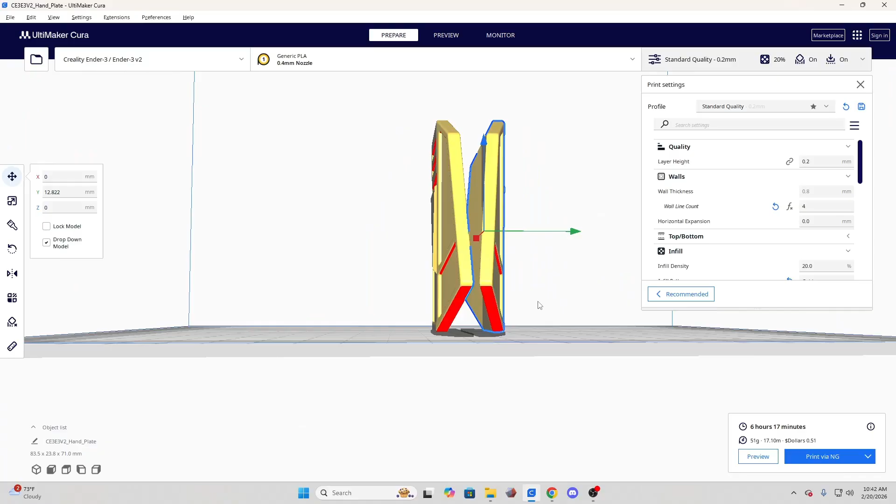Today I'm making a tutorial on how to measure objects within Ultimaker Cura. I frequently have to measure a lot of my objects whenever it comes to my cosplay projects and the props that I send out to my customers for custom sizing.

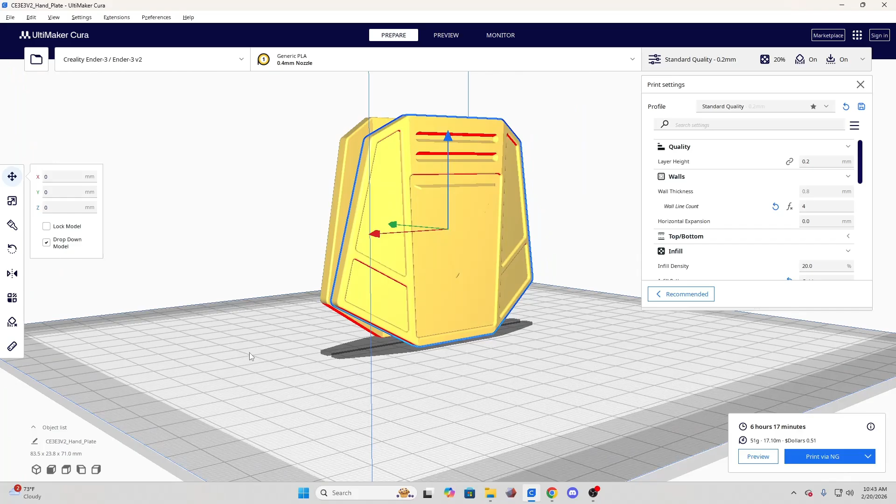So we're working with a Mandalorian hand plate today for one of my own personal projects that I'm putting together for Helldivers. Normally, whenever I have things made, I like to do custom sizing so that it fits me like a glove. So these are hand plates.

What you're going to do first is go to the Marketplace tab at your top right, click on it, and type in measure. I already have it preloaded because I did this earlier, but it's going to take a second to load.

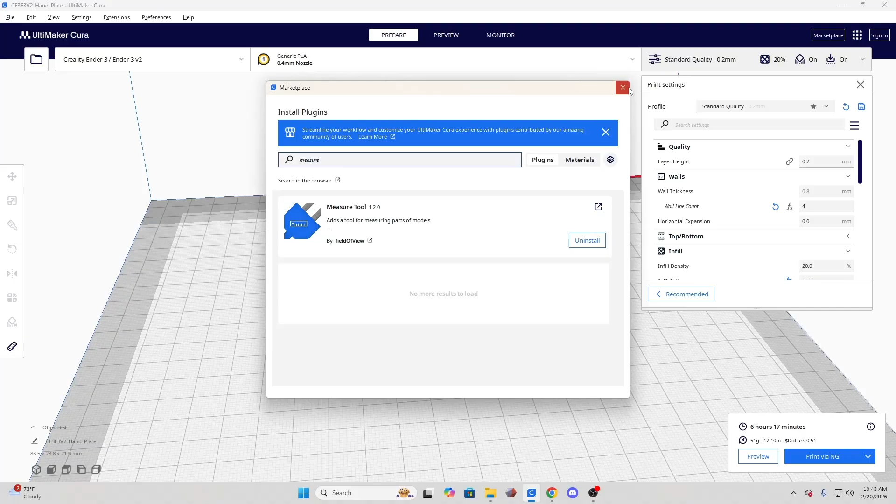You're going to install this. You may have to restart the Ultimaker app, but once it's installed, come back to this part of the video. And this is the part where I actually show you how this works.

So here's what we're going to do. We're going to click on measure, and it's going to come out as two dots. Right now I want to measure plate number 1. You click and the dots will appear. There's going to be 2 every single time.

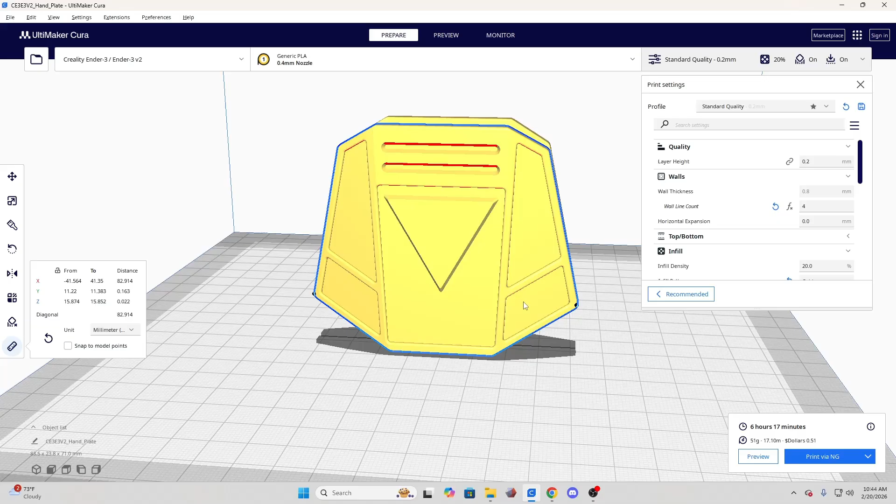You click and hold and drag them to the distances you want to measure. I'm measuring the farthest width along the x-axis right now, which is going to be denoted in red. That's 82 millimeters, or almost 83, and it's almost 83 down here.

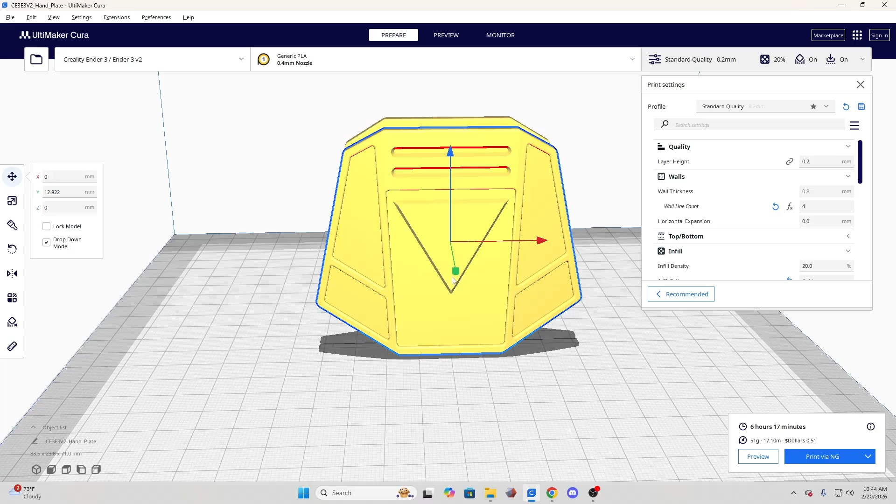You can even switch it to whatever measurements you want down here. I know some of my customers and viewers are from the European theater in England, so we have all the options down here. I normally go inches and millimeters because those are the most precise for me, but you can also denote the x-axis. Now let's do the y-axis, which is going to be our width.

I'll show you how to do that as well. You can just click it, drag it up here, click the other one, drag it up here. Now let me just fix the POV to the vertical. And voila, there we go.

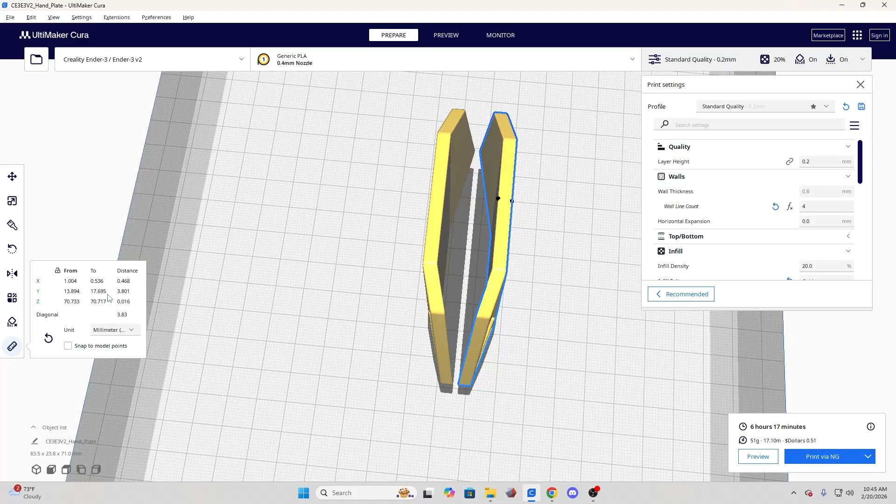Now we have the thickness width of our hand plate, 3.83 millimeters, and you can denote it here as well. It's not precise going from the diagonal to the Y, but it is extremely useful whenever we are trying to get exact measurements, or at least as close as we possibly can.

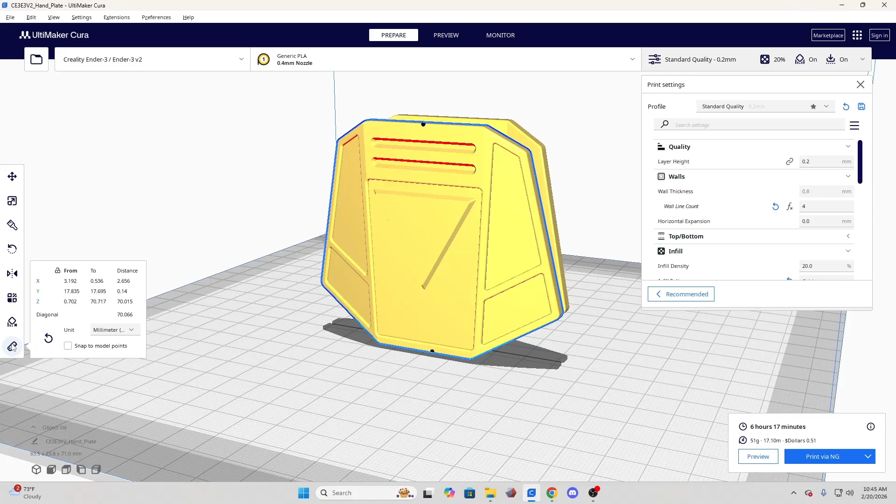Now, if we come here, all the way at the bottom, we have our Z, which is the total length of the hand plate. So when all is said and done, we can use the measurement tool to get precise measurements for custom sizing and for working on the objects that we have here in Ultimaker.

Instead of having to go to Meshmixer or Blender to size things out, we can just do it from here. It's actually extremely easy. You can get this up and running in less than 5 minutes if you go to Marketplace, click, type in measure, and install it, and it'll be with you for the rest of the time you are doing 3D printing using Ultimaker.

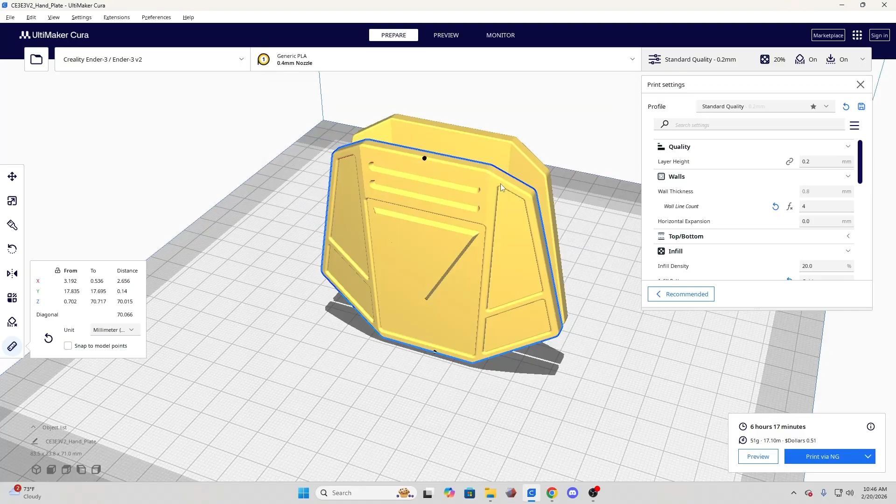All right, that is our tip for today.